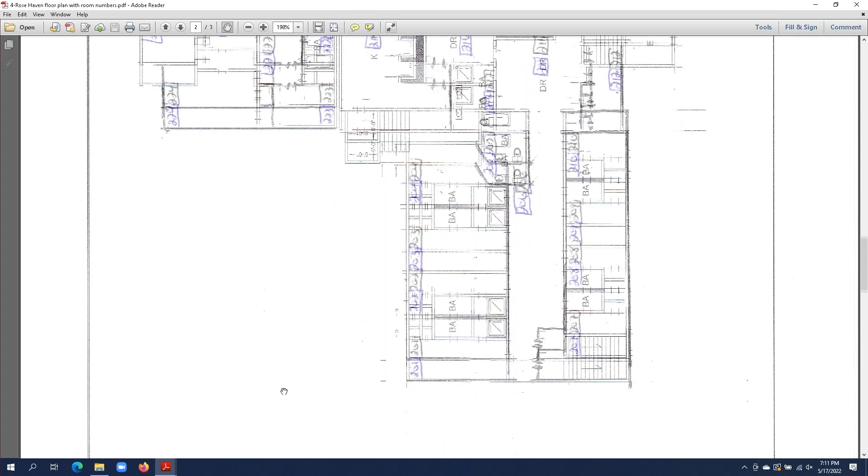And then I think you said this was an office back in here, correct? Yep. And then on the third floor, so you can see it all lays out very conducive to what was there. It's filling in some extra beds that are there.

We are requesting 2 waivers on this application. The first waiver is for full site plan approval. As I said, I've submitted a recorded plan that was submitted to the town back in 1997. It gives you a very good understanding of what is out there today. There are a few modifications if you drove out there that aren't shown on this plan, but they aren't conducive to what we are here tonight for, so I felt that this was more than enough information for you guys to make your determination on.

The second one is related to parking. Due to the fact that our residents don't typically have cars, I looked at the Google Maps for the last 25 years or so. They get a little blurry when you get back to 1997 and 96, but I couldn't find any time that there were more than 4 to 5 cars on site. Again, we've had one person typically that has owned a car. Most of the clients that bring their family members to them would rather them not be able to drive. That's kind of what we are for.

So by adding these extra beds, if you take the calculation of one person for 28 beds currently, it comes out to about 0.036 per bedroom. You times that by 40, it comes out to 1.45 cars per 40 beds that we could anticipate having. We anticipate needing 1 staff member per 10 residents, so if we get the full of the 40, we need about 4. We need 4 cars for 4 staff members to help them out there. That would still leave us the 3 extra spaces that are staying on the plan as far as 7 to accommodate anybody that did have a car.

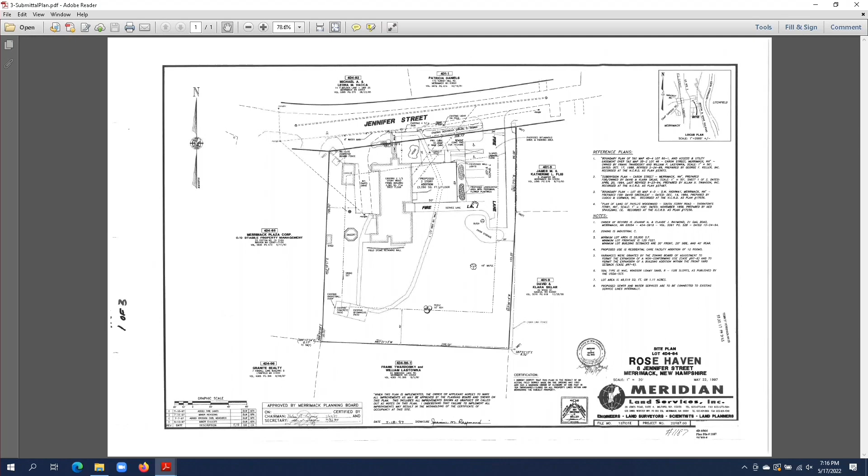That's depending on the shift, that's what will be there. So at night, there's less, because most of the time they're sleeping. Second shift, there's less. Third shift, there's only 2. So the first shift, there's between 4 and 5, depending on if there is a visitor. The throughway through the fire lane is kind of how the delivery trucks deliver food, so they don't take up a parking space to do that. So the parking spaces really are for the employees and the guests, and there's plenty.

I think one thing to mention again that Matt had said is the same family was here for 30 years using the same square footage. So all we're doing is taking a desk out and putting a bed in to allow us a resident. We're still using the same square footage. We're not doing a single modification to the building that hasn't already been completed in order to accommodate the residents.

So when we did the renovations between the last owners and now, we upgraded the entire building's alarm to today's standard. That's already done. We had a fire protection engineer come in and assess, and we made the changes through the building department and the Deputy Fire Chief Manueli to the sprinkler system. That's done. So all the renovations that need to be completed have already been completed. So there won't be excessive construction trucks or anything like that that need to come in once the approvals are done.

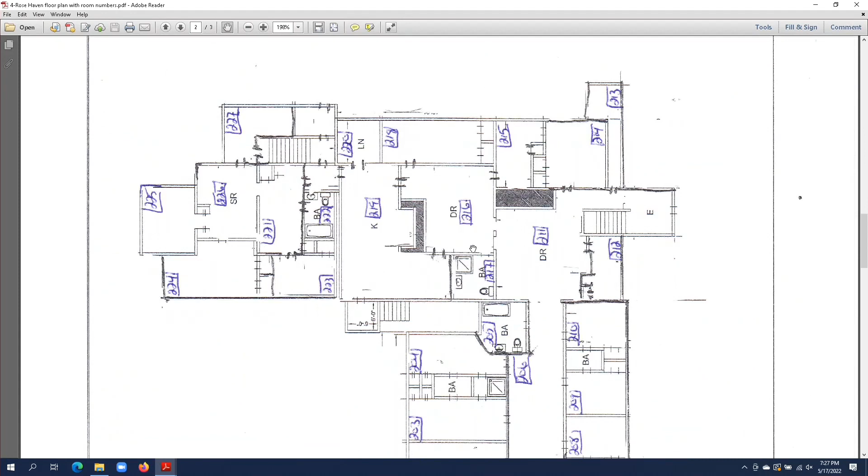You're saying on these plans here, you'd like them modified? Well, I'd like them at least modified to show, like what's an SG? I think I saw that on one of them, yeah. Oh yeah, no, that we can modify these plans. And just modify it to show which ones are bedrooms, which are common space. Yeah, and so that we have that a little bit clearer as to what's going on the floor plan, on record.

These wouldn't be part of the site plan package? And like, where's the kitchen? You know what I mean? Where are the utility rooms? Where's your clean utility room? Where's your dirty utility room? Right there. I understand LN is laundry, I can't see the number. DR? Oh, LN, right. Dining room. Dining room, okay, got it.

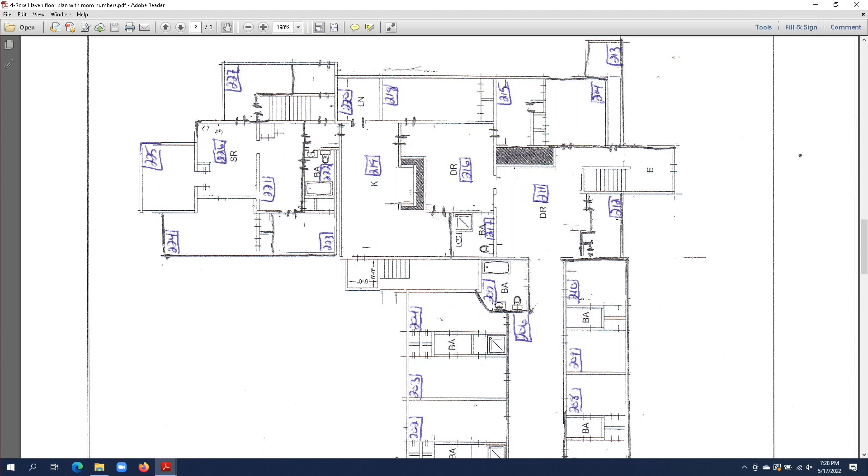Dining room, yeah. Exit, E. Kitchen, K. What's SR? Storage room. You know what I mean, only because your utility room, especially your dirty utility room, that may be a source of interesting stuff that's in there. And if you're storing chemicals in there, the fire department would need to know that as well and where the location is.

They're not gonna get it from this. Sorry, but I would say it needs to be modified at least, at minimum. I'm sure the building inspector wouldn't give you an occupancy permit based on these drawings, but we're just dealing with the site plan itself. So what they're pulling in from 1997 is the site plan. They just drew these up, I'm assuming, just to give us a little clarity as to what's happening inside. Yes.

Do we have any further discussion? No. Do we have any motions regarding the completeness of this application?

Mr. Disco: I'll make a motion to accept this plan as complete. Do we need to act on waivers before completeness? No, you vote on completeness before voting on waivers. You mean for the parking waiver? Yeah, for instance. So we can accept it and then make modifications afterward. Okay, then my motion will be to accept the plan as complete.

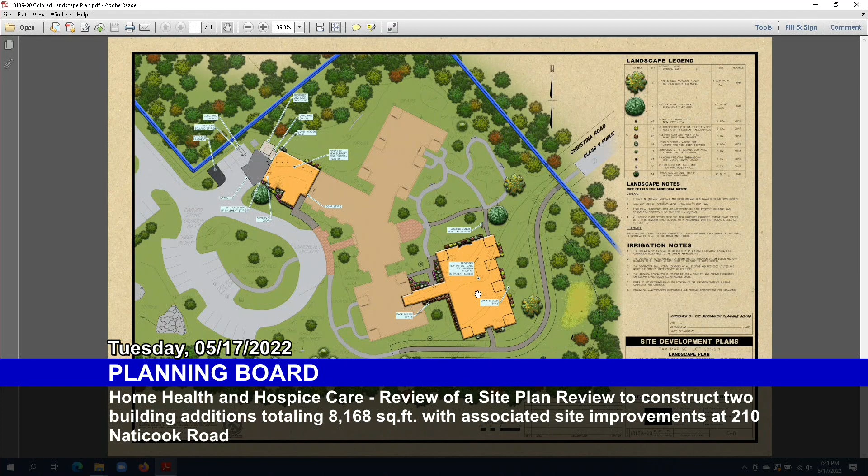Basically, that's the context of this site. We've met with the zoning board to receive a variance for the expansion and the use earlier in the spring, or the winter, and received that variance to produce this plan before you today.

Additionally, there's a new service support wing on the north side of the site that's 1,908 square feet, designated for storage of medicine and new diagnostic equipment, a training room, break room, and staff restroom. It'll basically assist the nursing and administrative staff in their roles within this facility.

As Barbara mentioned, these additions are being sought due to the high demand that's existing in the community and in southern New Hampshire.

There's an existing roughly 48 parking spaces on the site, around this circular drive, and a parking field off the side that is more than adequate for our intended existing use as well as the proposed addition. The regulations require less than the 48 existing spaces, so we're not proposing any new parking because we do not foresee the demand, and we're providing more than the minimum requirements by a factor of at least 2.

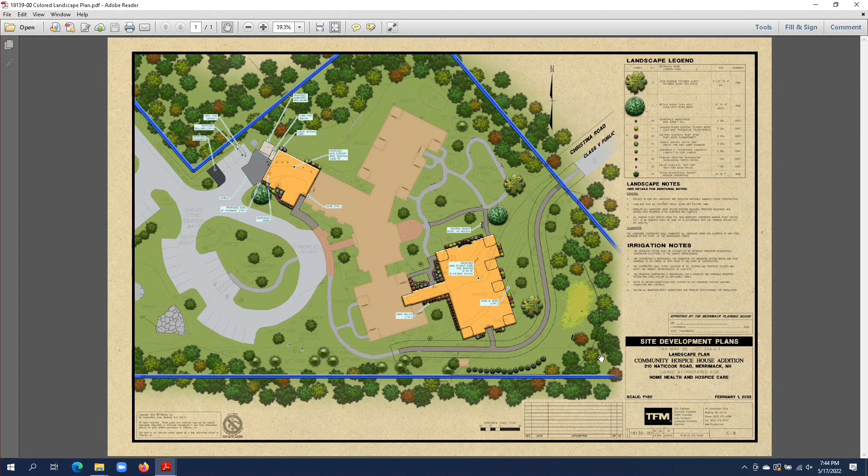Thanks. Go ahead. Yes.

I'm just going to go to the elevations and look. Good evening, Robert Schaefer, Vari Schaefer and Diamond Architects. So we'll start with the elevations as we have here.

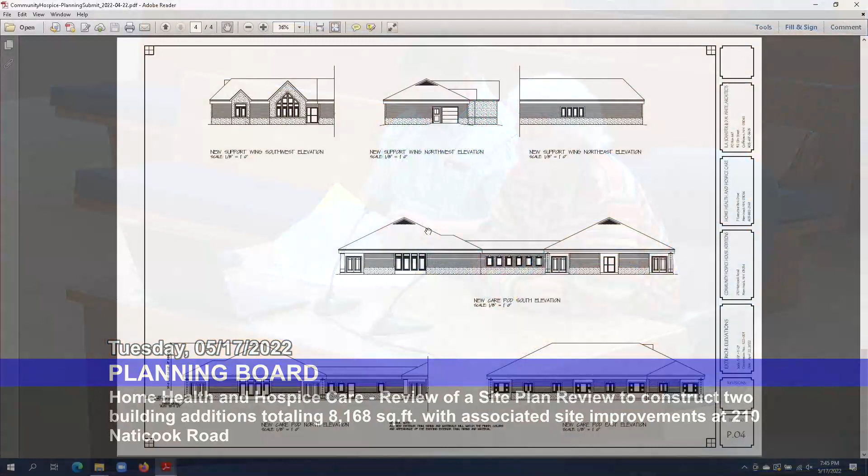The lower left one is called the New Care Pod North elevation. On the right side is existing, on the left is the new addition. The goal for this design is not to make a statement, but to make it blend seamlessly with the existing facility, so it looks like it's always been there. All finishes would be comparable, if not the same. Some things have changed over the years, so we'll take advantage of those where appropriate, but the windows, the doors, all aspects of the architecture, design, and detailing would match what is currently there.

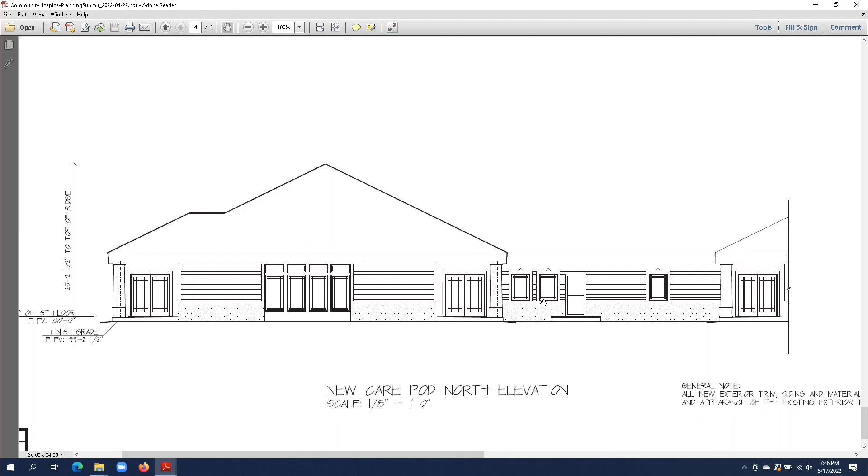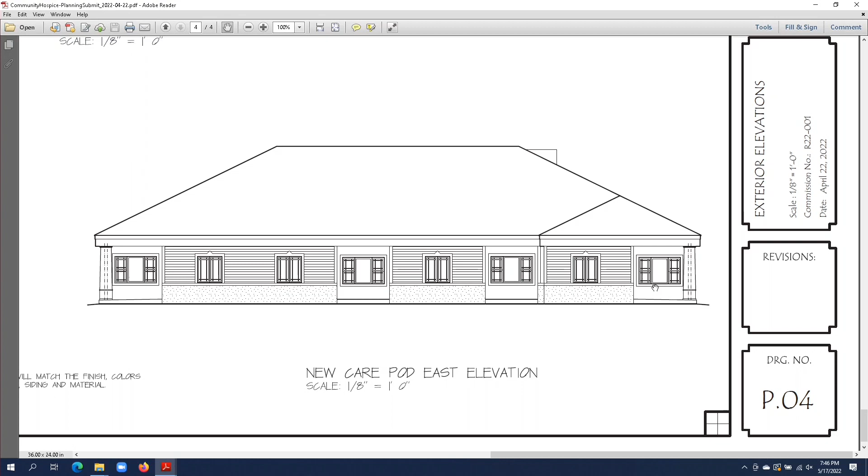If you want to zoom out, we could walk around. On the right is the back elevation of the new pod, which would resemble the other elevations of the existing facility where the beds are. So it'd be like from the dead-ended road perspective. There are 4 patios, as you can see there.

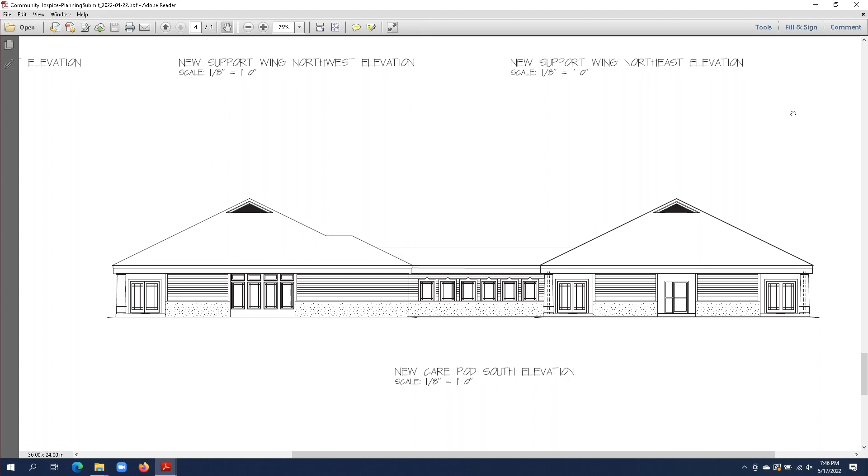This is the opposite side of the first one we looked at, where on the left is the existing, and the right would be the new, with the connector between them, opening with plenty of glass to try to get that to appear connected on the interior and be one facility on the outside, with landscaping around it and things like that. So the windows will give you a nice experience walking through the connector.

Then the top ones are the new pod, new end to the support facility, extending out and creating additional storage where that garage door is at the very end, and then where the high peaked and large window area is, the training facility. In the back would be a break room, bathroom, and it loosens up the interior support areas for some other functioning, like the kitchen can expand a little bit, the laundry can move to a slightly larger room, things of that nature, so the interior facility can function more efficiently and appropriately for the care they provide.

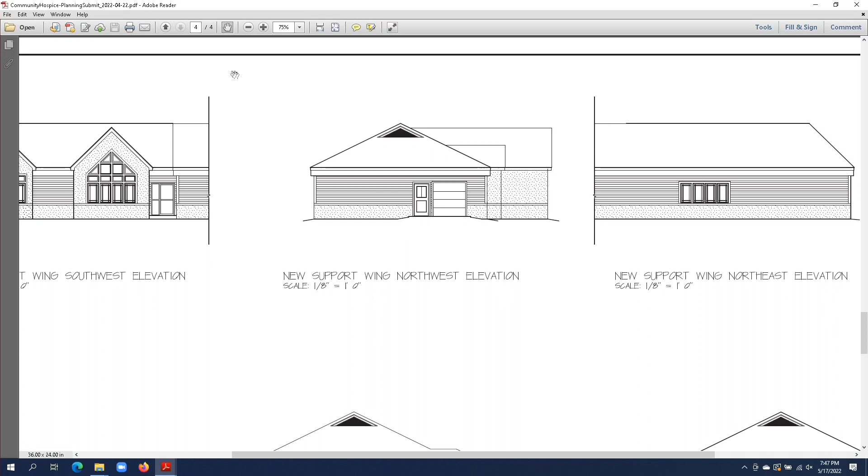Let's move to the floor plan, roughly. Is this one okay, or should I proceed? We'll go to the big one first, the overall one, then I can jump back to this.

So there's the overall facility with the additions added. In the central area is the existing facility, main entrance at the bottom right with the 6 pillars and the line around it - that's the entry canopy. The support addition is there on the left, just extending what's currently there now, and you can see the rooms that I explained a moment ago.

If you go back out, in the upper right is the new bed pod, a 6-bed pod. It's modeled after the one on the left. The one at the left end of the existing facility is a 6-bed. This is modeled after that, except it has an additional nurse desk and some support rooms to provide for the functions of that space on their own.

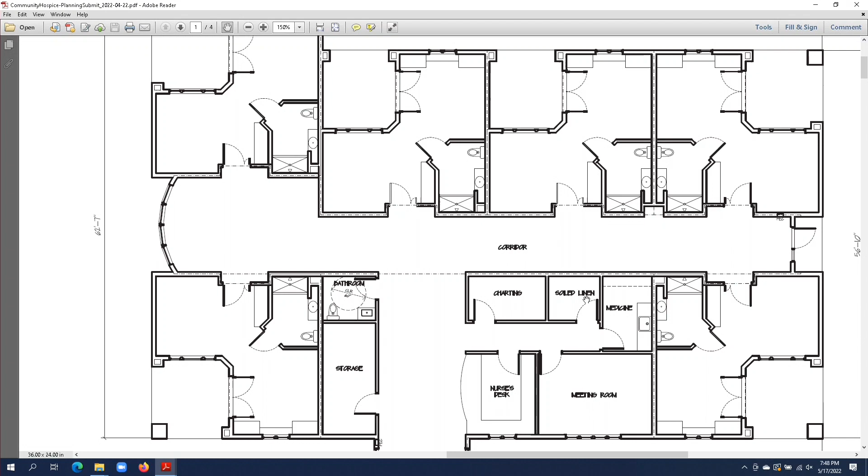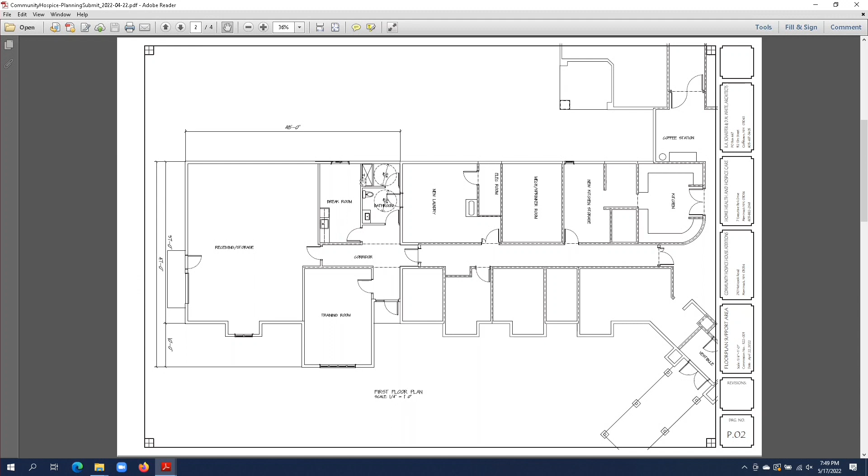If you go back out, now you can see the overall layout - as you come into the facility, you would turn right, go up, and that would all blend together as one facility. On the left is existing, and then the support wing is to the bottom left. I think these are just larger scale versions of the same, for you to see it a little better. We can do the other pod too.

Same with this one - you see the 6 beds and the central support area with nurse's desk and supporting rooms around it. I think that should be it. So, we'll do questions at the end - does that make sense, or did you have questions now?

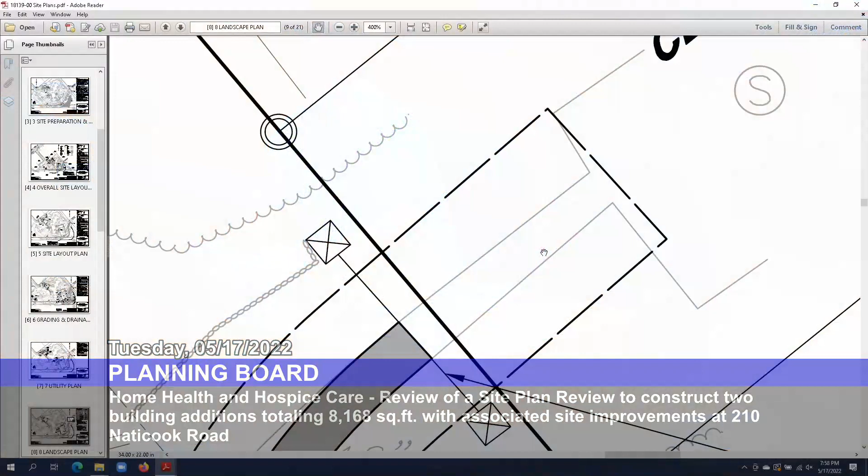Yeah, hold on. Now, as I'm looking at the picture you have up right now, it looks like the stretch that Mr. Ranke was talking about is not on your property, correct? That's correct. That's the town right-of-way.

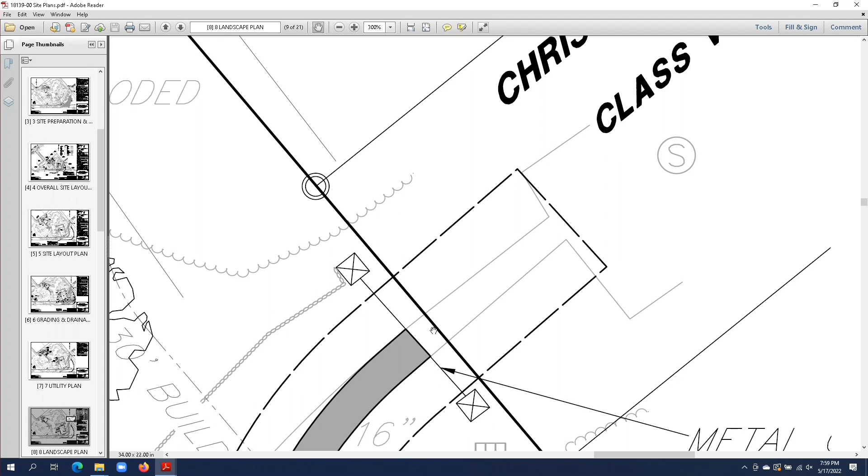Town right-of-way. Now, Casey, I don't know if they're even able to. Yeah, you'd be trespassing. I'm not sure if DPW would support that or not. I think that's something they would want to review.

So if there were to be an improvement in the right-of-way, I would recommend this application gets continued to another night so that DPW has a chance to comment on that.

Now, is the gate that he's talking about on your property line? I'm assuming it's not in the public right-of-way. Correct. I saw a picture of it somewhere.

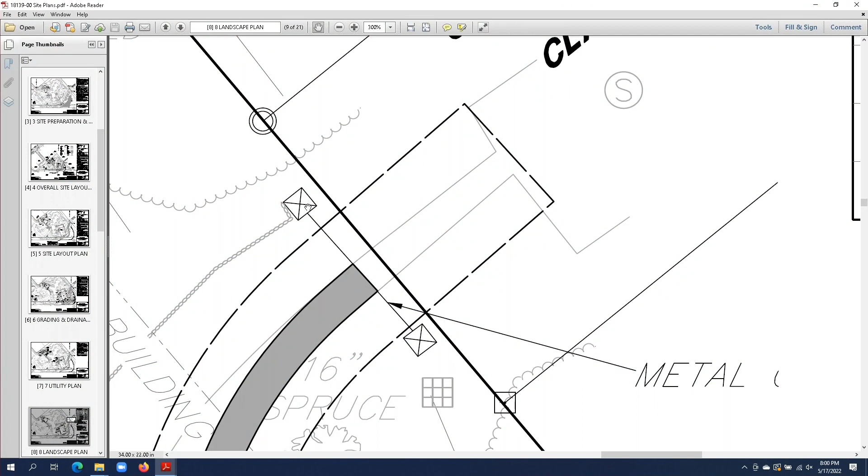Did he? I thought I saw one too, and I couldn't find it in the packet. See if it shows it stopping at the gate. It does continue to the property line.

The photo here. I'll—

No, unless this has a street view from Google I could load. Can't see it here. Is this connected to the internet? Because I could load a street view from Google Earth.

I mean, just looking at it, in terms of pending DPW's approval, I think it's such a small amount of work that we wouldn't have a problem paving that additional section of sidewalk. We don't have the power to tell you to pave something off of your property.

That would just be being a good neighbor. But that would be something you would have to, as staff said, clear by DPW. Yeah, that would involve getting a right-of-way permit to do any kind of work there. I wouldn't want something like that to get in the way of getting this approved, like having that sidewalk connection made.

But, as mentioned, we would like to improve the situation if necessary based on the testimony of the abutter, which I believe to be true and factual. So we'd offer that, and I'm not asking for a conditional approval tonight—I was going to get into that later.

I've reviewed the Fuss and O'Neill comments. There's several, like any project, but most of them are pretty belt and suspenders engineering comments. I'm an engineer, a PE, so I believe the resolution of these comments will not change the material view of the project as presented today—i.e., the building won't change. I'm not sure about the board's temperature on conditionally approving it subject to handling these offline, but I'd like to see if there was an appetite for that.